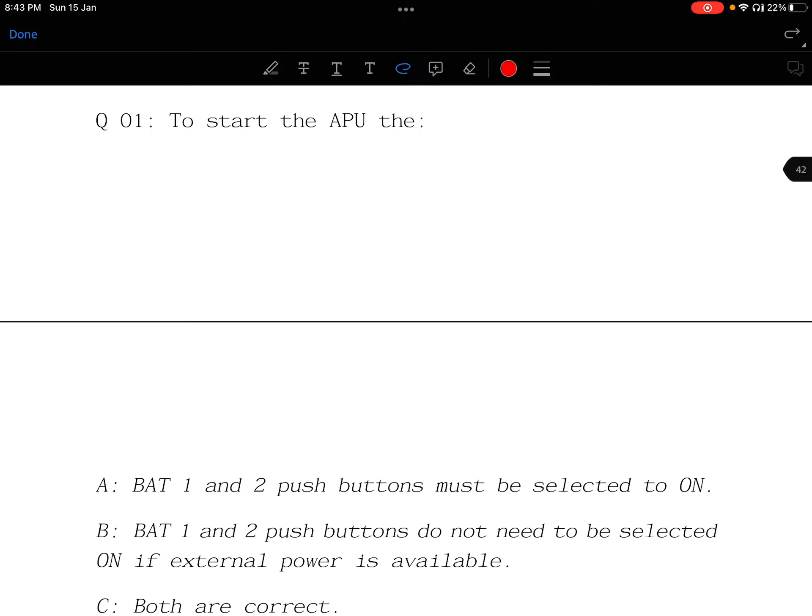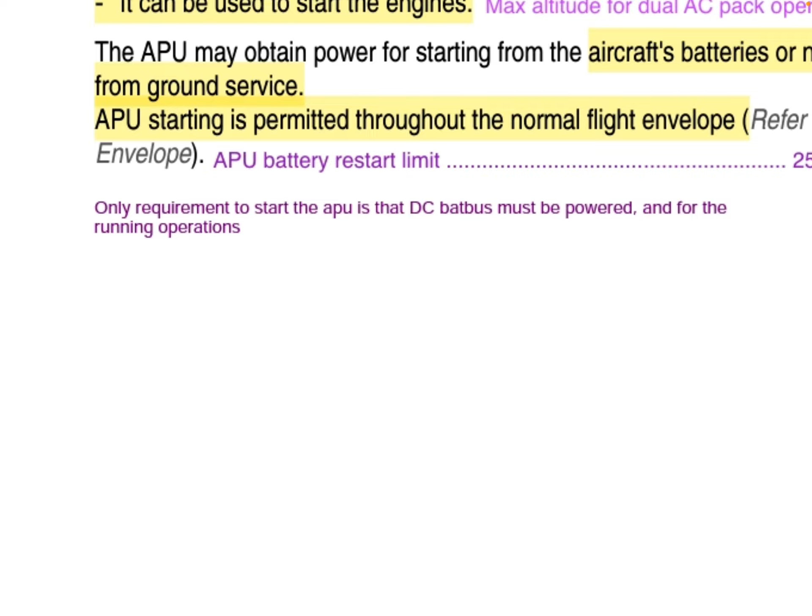So what do you think? I have told you, if you have gone through my video of APU from FCOM, that the BAT bus should be powered to run the APU. Let me show you. I told you that the only requirement to start the APU is that DC BAT bus must be powered, for the running operations, right?

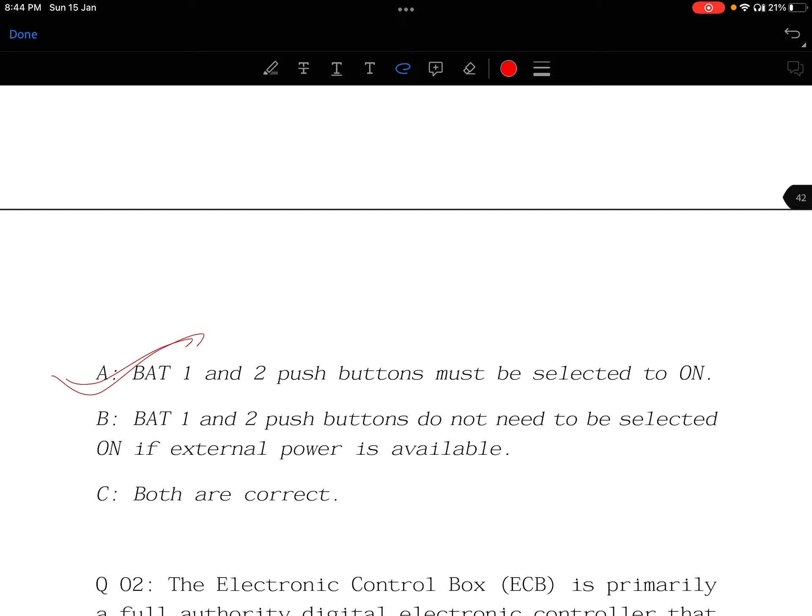So option Alpha is correct, right? Now we'll go to the second question.

The electronic control box, ECB, is primarily a full authority digital electronic controller that performs the APU system logic for all modes of APU operations, such as sequencing and monitoring of the start - correct. Speed and temperature monitoring - correct. Monitoring of bleed air and shutdown - correct. So all three options are correct, so all of the above.

ECB controls everything, right? When the APU master switch is released, a normal APU shutdown occurs - yes it occurs, but with a delay if the bleed air was in use. I have told you during FCOM discussion, if we are using APU bleed air, then it shuts down after a 60 to 120 second delay. It's known as the cool off period, right?

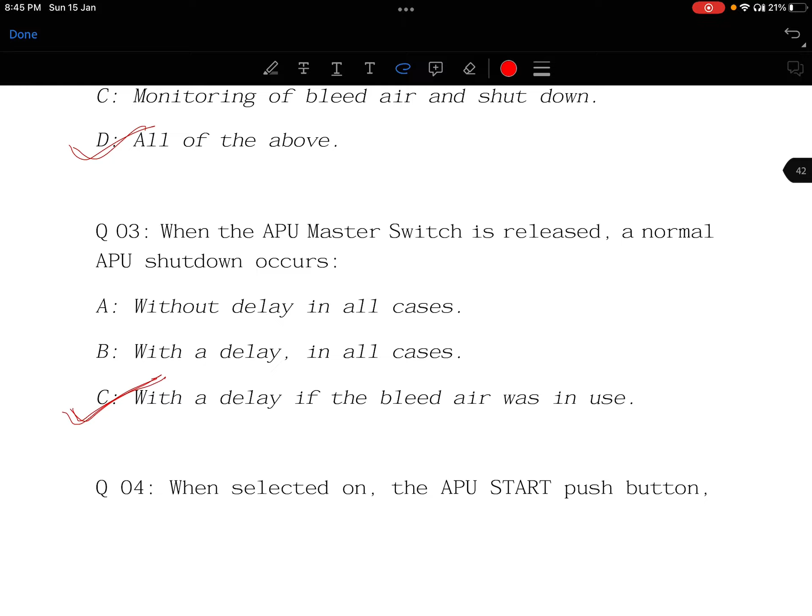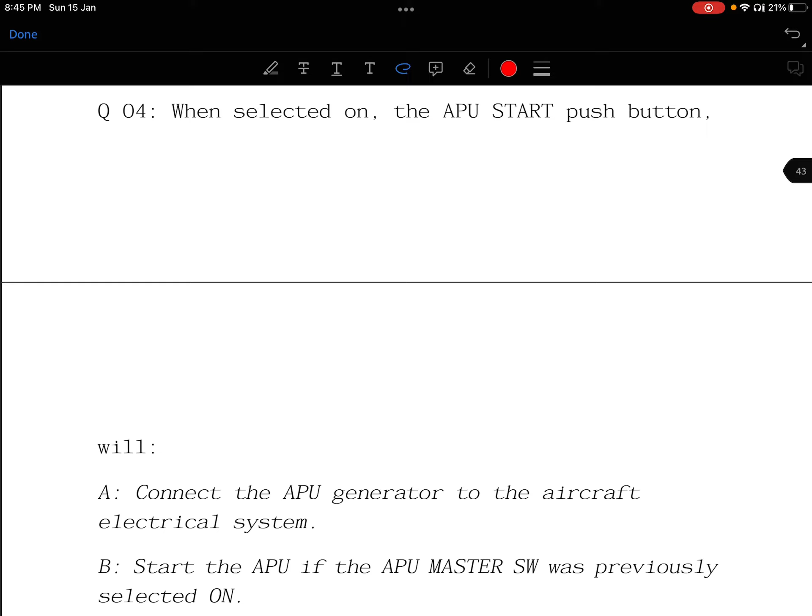When selected on, the APU start push button will connect the APU generator to the aircraft electrical system, and start the APU if master switch was previously selected on, right? This one seems right, Bravo. If you have selected APU master previously and then you select APU start push button, then APU starts.

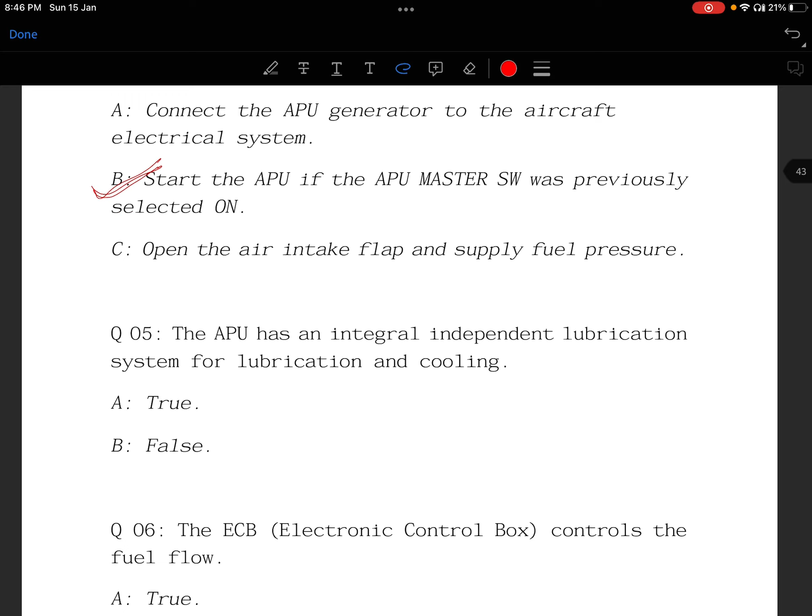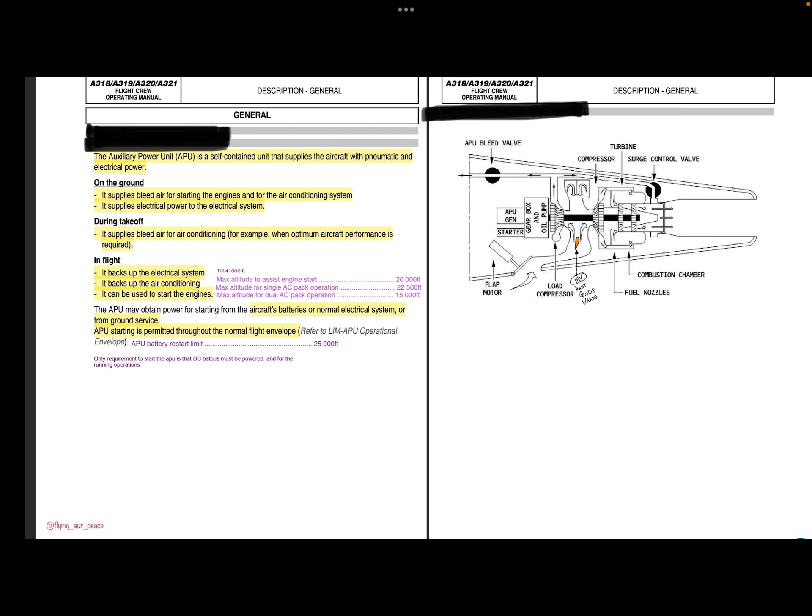Bravo. The APU has an integral independent lubrication system, correct? I can show you, this is in the notes, right? Where is it... here it is, oil system. APU has an integral independent lubrication system. You can check it from FCOM.

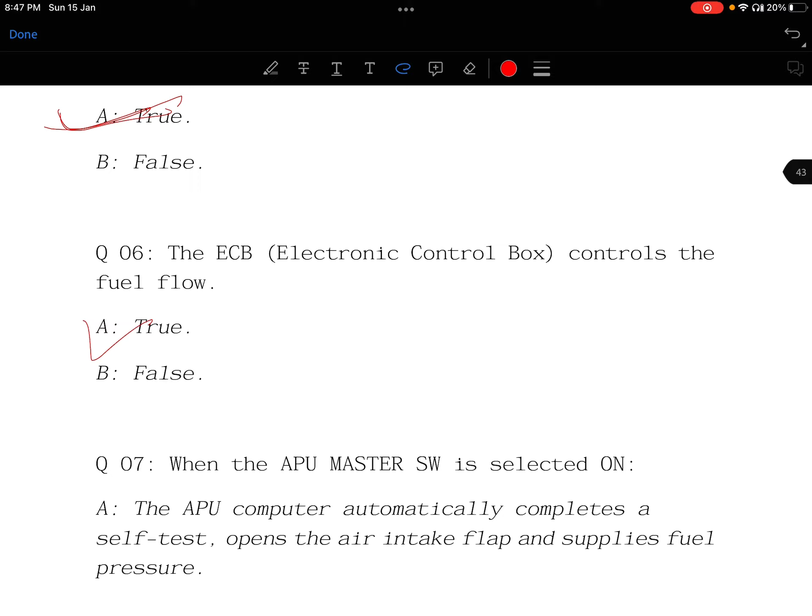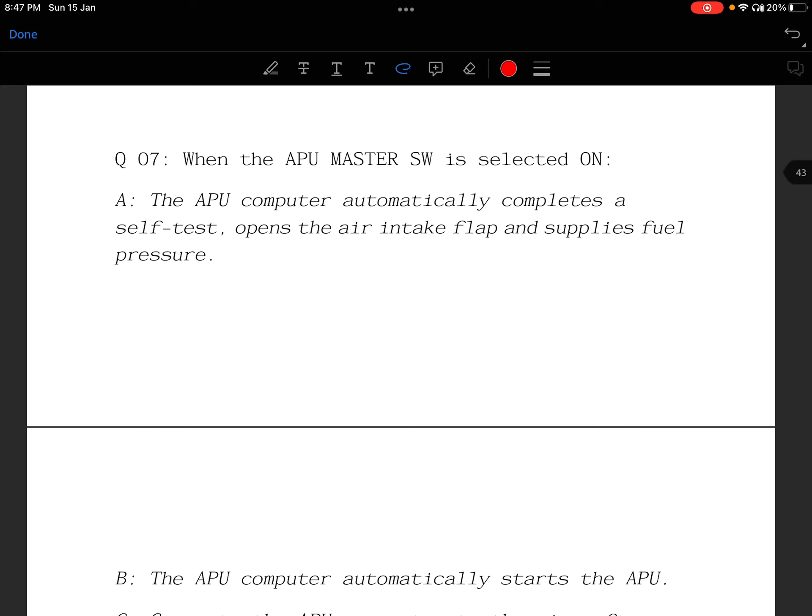The ECB controls the fuel flow - is it correct? Yes, ECB controls it. When the APU master switch is selected on, the APU computer automatically completes a self-test. Yes it does, opens the air intake flap and supplies fuel pressure, okay.

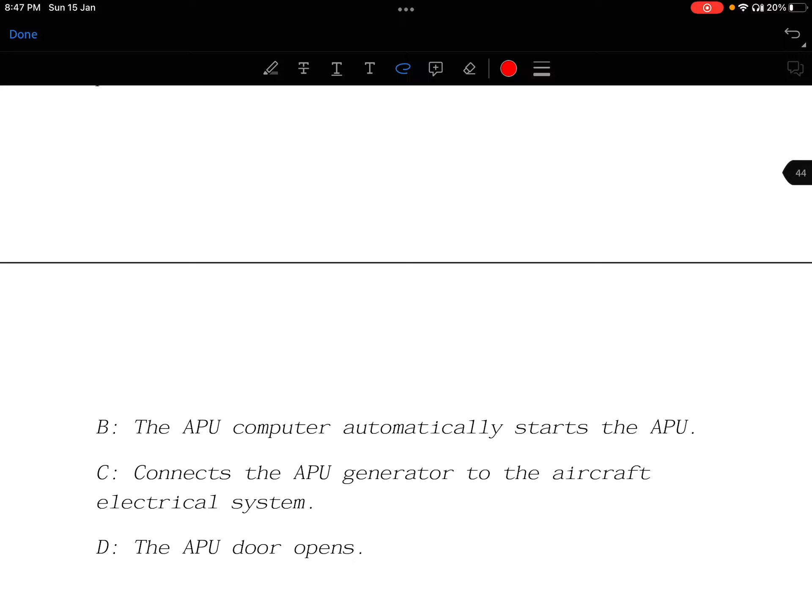Let's read the other options too. The APU computer automatically starts - no. Connects the APU generator to the aircraft electrical system - no. APU door opens - no. So option Alpha, yeah, correct.

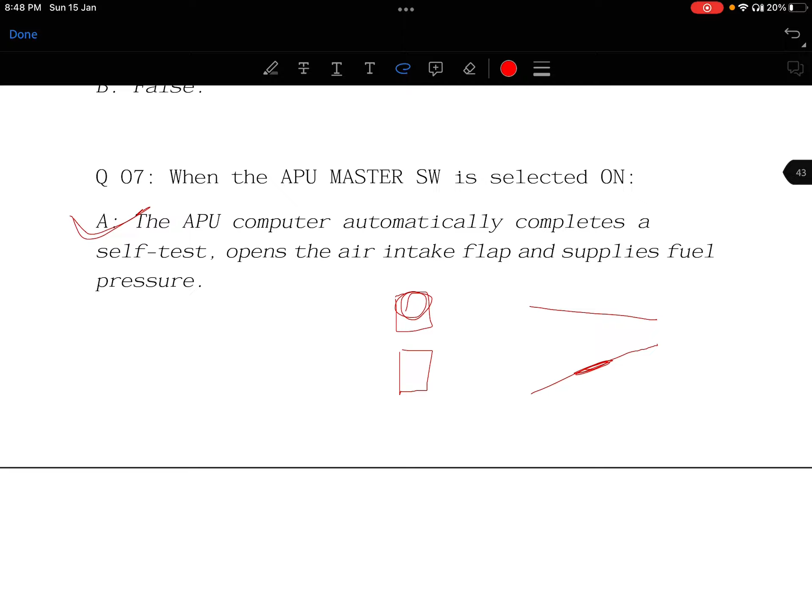So whenever you press the APU master push button, let's say, and this is the start push button - whenever you press master switch, the APU does a self-test for leaks and everything. Then it opens the air intake flap situated here, right, and supplies fuel pressure. Are you getting it? Right.

Now, eighth question. The APU master switch fault light will illuminate when APU low oil pressure is detected - seems right. When an automatic shutdown of APU occurs - right, correct. For an APU overheat or APU fire - okay.

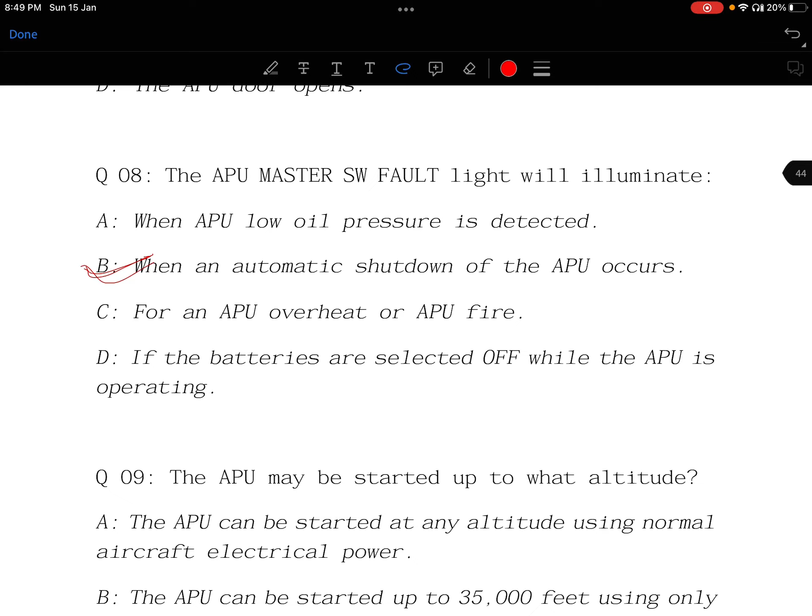If the batteries are selected off when the APU is operating - all Alpha, Bravo and even Charlie seem right, but I think Bravo is the more appropriate answer, everybody says. Let me show you from the FCOM.

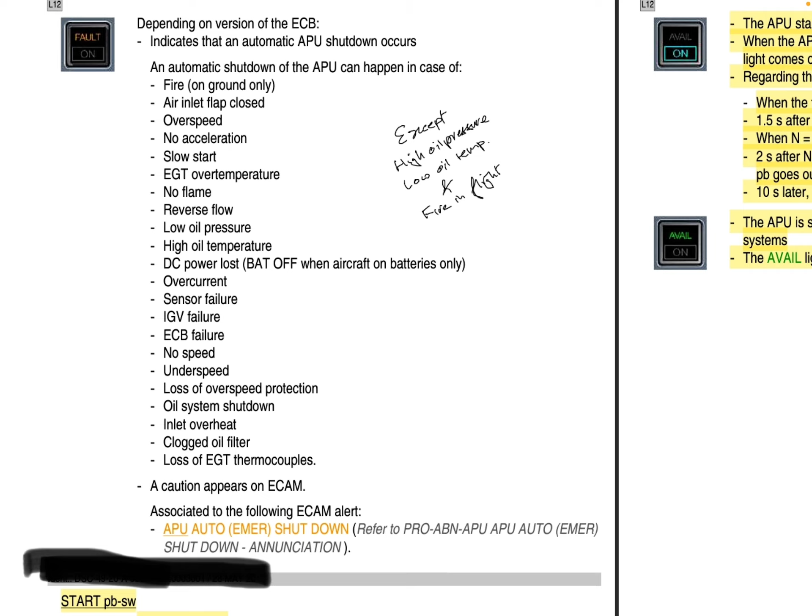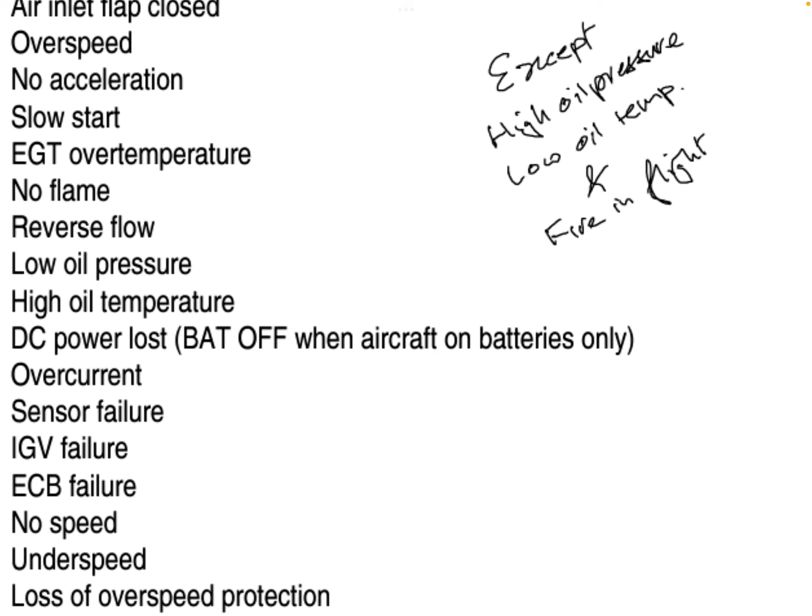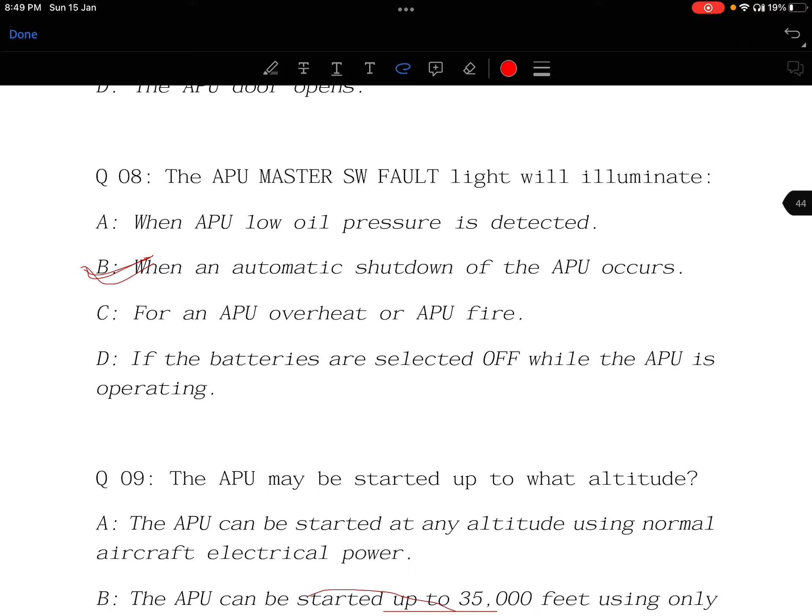Here are the reasons why the fault light illuminates on the master push button. So this was the option: APU auto shutdown. Other options were APU low oil pressure is detected, repeated a few times. These are right, but as no option says Alpha, Bravo, Charlie are correct, we are selecting option Bravo for this sake only.

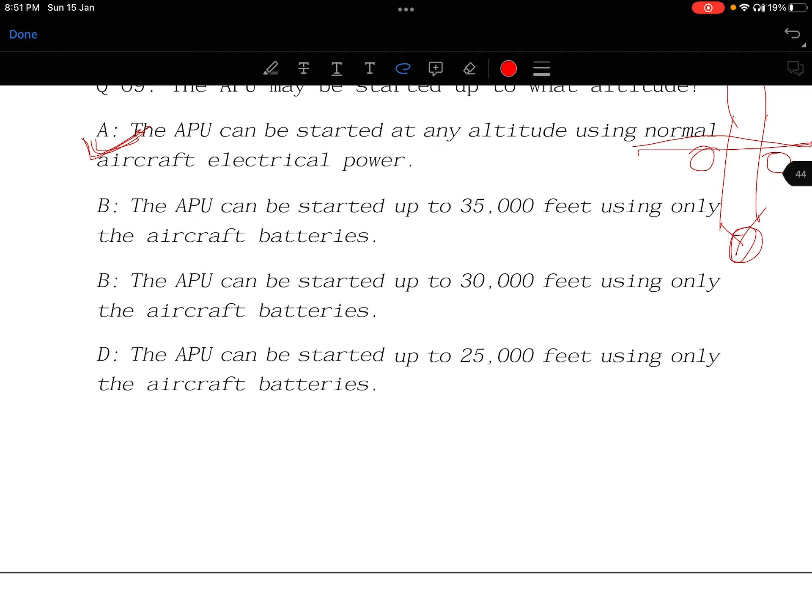Option Delta, you will figure out, also seems correct: the APU can be started up to 25,000 feet using only the aircraft batteries. Yes, it seems right, but the word 'only' is misplaced. If you figure out the meaning of this line, it's different - it's saying that only the APU can be started by using aircraft batteries only. No, it's not like that. But yes, if you are using aircraft batteries, then you can start it up to 25,000 feet only. Figure it out.

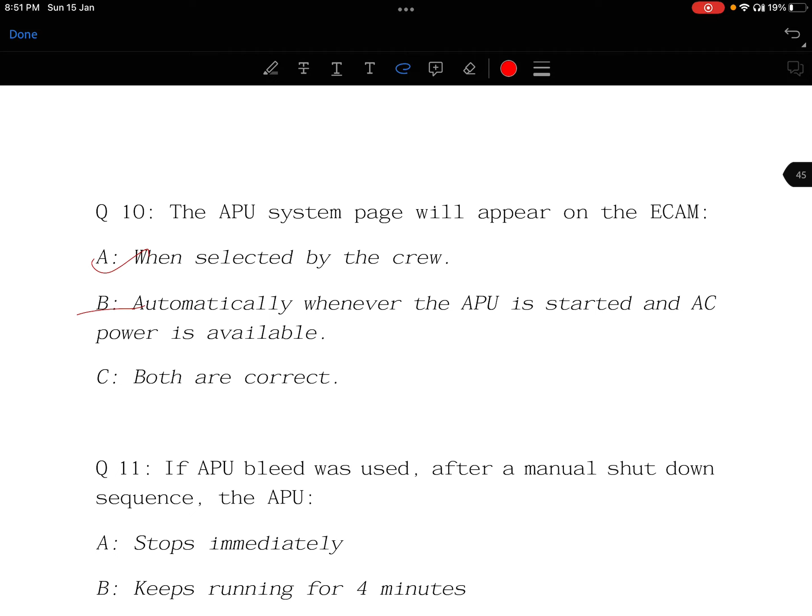The APU system page will appear on the ECAM when selected by the crew. Correct. It appears automatically whenever the APU is started and AC power is available. Correct, so option Charlie is right.

Question number 11. If APU bleed was used after a manual shutdown sequence, the APU keeps running for 60 to 120 seconds, right? So 60 to 120 seconds means 2 minutes, right? So both options seem correct.

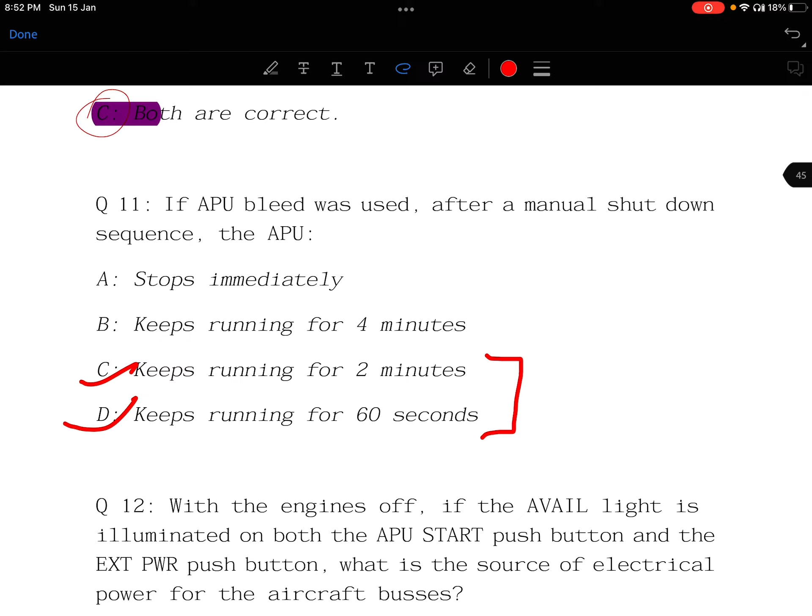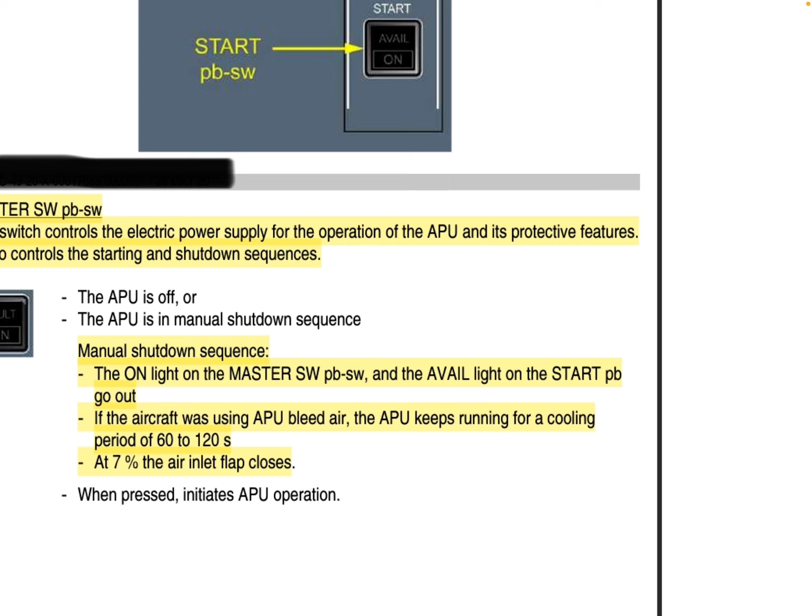I can show you if you want to. Here it is. I told you this is an important line, there are so many questions on it. If aircraft was using APU bleed air, the APU keeps running for a cooling period of 60 to 120 seconds. But if you go to the correct answer, then option delta is marked. But both options seem correct.

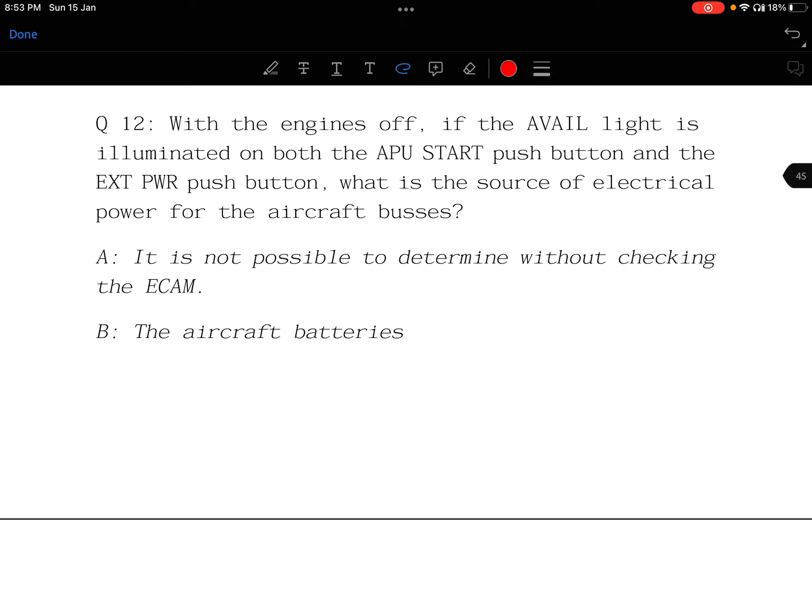With the engines off, if the avail light is illuminated on both the APU start push button and the external power push button, what is the source of electrical power for the aircraft buses? 12th question. Is it not possible to determine without checking? No, it is possible. Is it the aircraft batteries? No. External power, the APU, or external power?

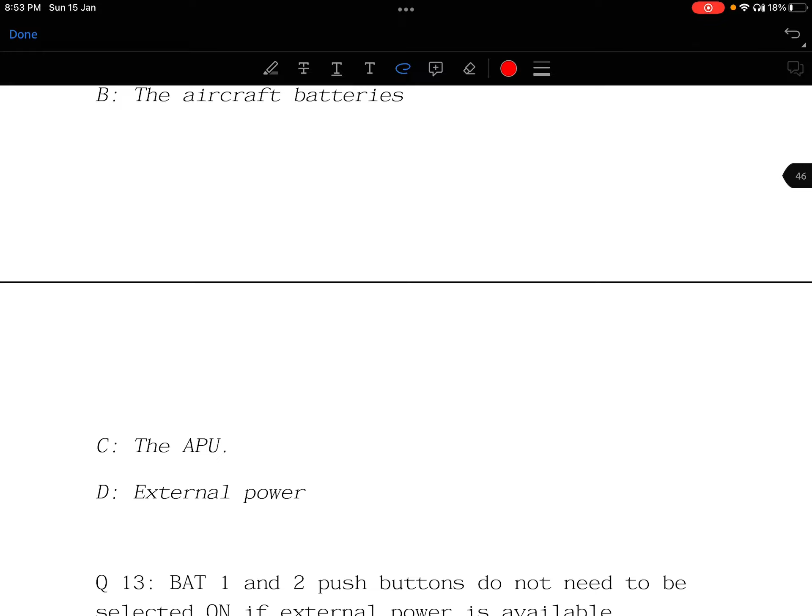As far as I know, here is the priority sequence. Number one, aircraft generators. Number two, external power. Number three, APU. And it's quite obvious looking at this priority, because the APU is a relatively very small generator, right? But the answer marked is Charlie, APU. I don't know why it is marked Charlie. According to me, it should be external power. If both are available, then the priority goes to external power.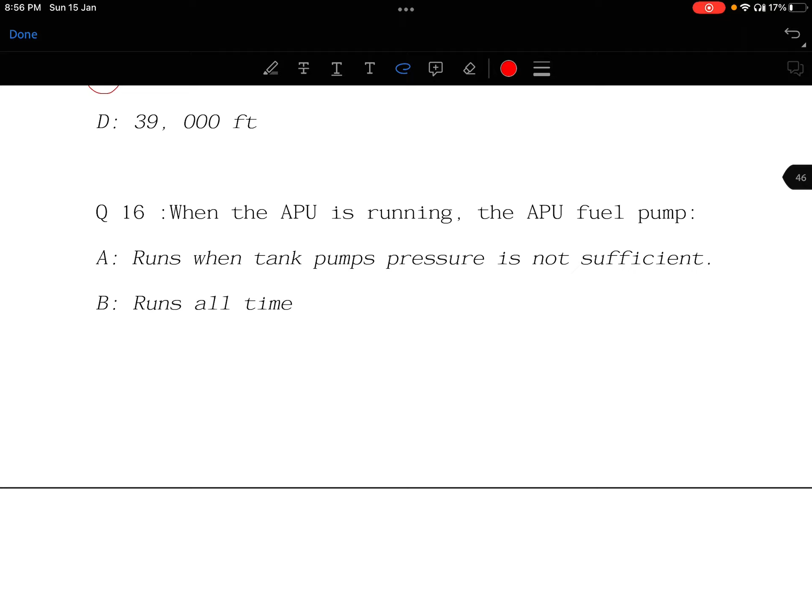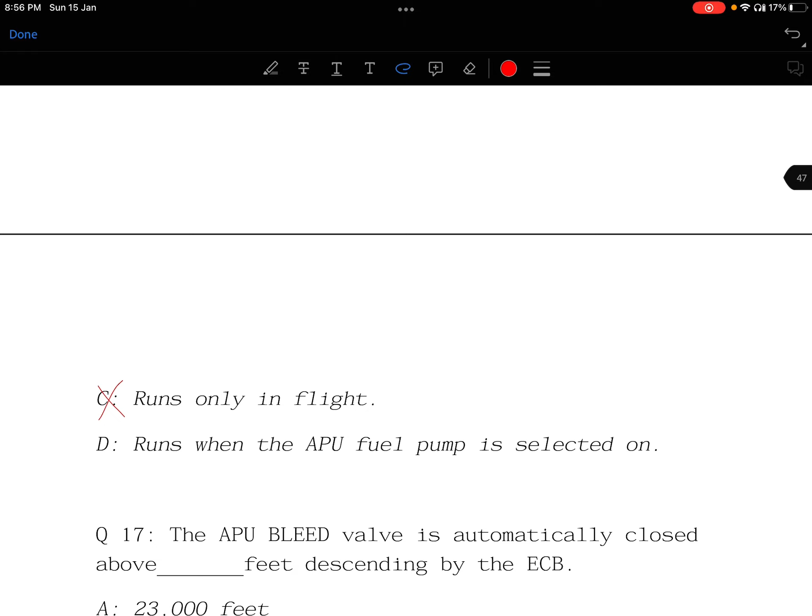When the APU is running, does an APU fuel pump run automatically when tank pump pressure is not sufficient? Yes, seems correct. Does it run all the time? No. Does it run only in flight? Wrong. Does it run when the APU fuel pump is selected? There is no such thing as an APU fuel pump, I have told you this during the FCOM explanation.

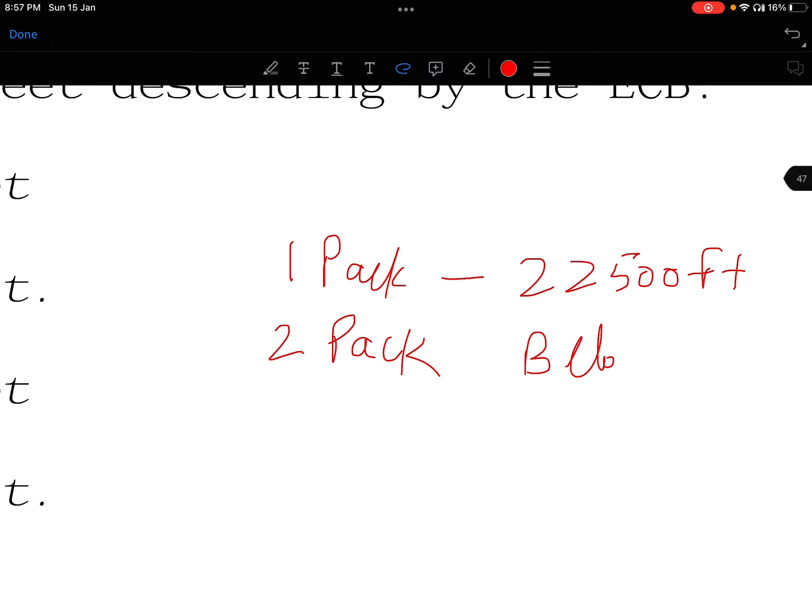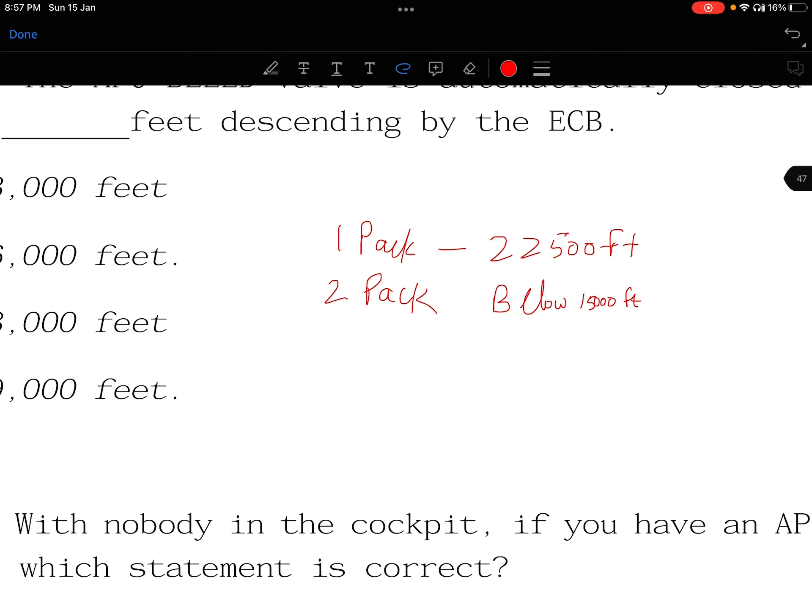17th, the APU bleed valve is automatically closed above. Nice, this is a good question. So we can use a single pack, one pack, till 22,500 feet, right? Two packs below 15,000 feet only. But if we are above 22,500 feet, then automatically the APU bleed valve closes. It's a safety feature, so we have given a margin of 500 feet. Airbus has given a margin of 500 feet, so option alpha seems right.

With nobody in the cockpit, if you have an APU fire, which statement is correct? So nobody in the cockpit if you are having an APU fire on ground, the APU emergency shutdown will occur, yes, and the APU fire bottle will be discharged automatically. Correct, seems correct. On ground, you have to perform ECAM actions.

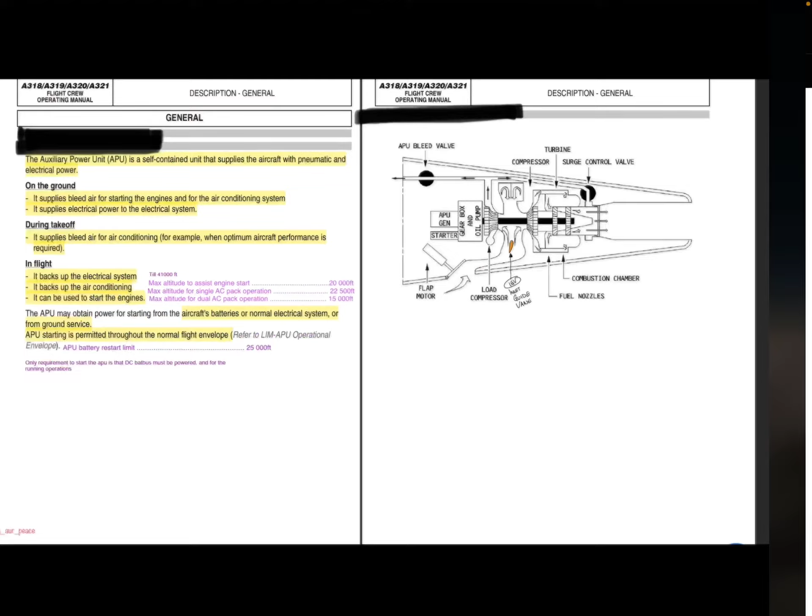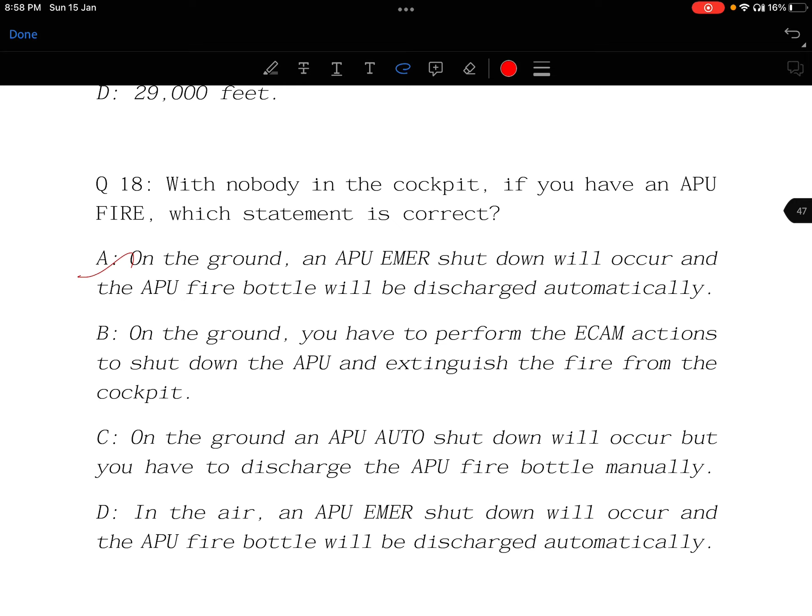How will you perform ECAM actions when nobody is in the cockpit? No. I have told you that the APU automatically shuts down if the aircraft is on ground, and the APU fire bottle discharges automatically, right? And we can shut it down from the 108 VU panel. I have told you where it is, it is situated near the nose here. We can press this APU fire push button, ground personnel can press it and shut it down, right? But we are talking about emergency shutdown. Option alpha.

19th question. The basic element of the APU is a single shaft gas turbine which delivers mechanical shaft power for driving the accessory gearbox. Yes, we have two-stage compressor, it is correct, but the mechanical shaft provides the power for driving the accessory gearbox, basically the generator.

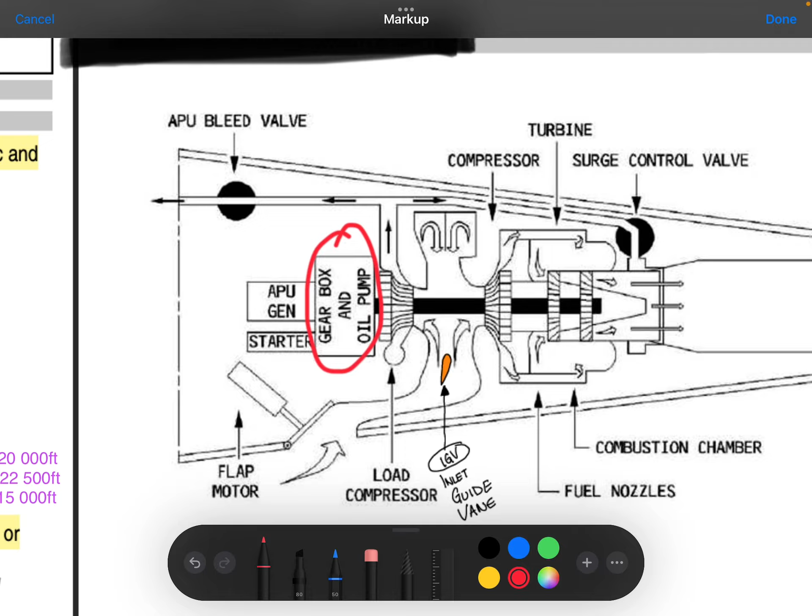Let me show you if you are finding difficulties to imagine. Here it is. So here is the accessory gearbox, and this is the mechanical shaft. It is connected. So option delta is correct. Mechanical shaft.

Yes, I agree, it's a compressor which is connected, but in the end, it is connected to the mechanical shaft.

Question 20th. We are reaching half of our questions. Fire on ground or fire in flight will cause the APU master push button fault light to come on. This is a very good question. So basically, if you are in flight and fire occurs, then it doesn't show fault light.

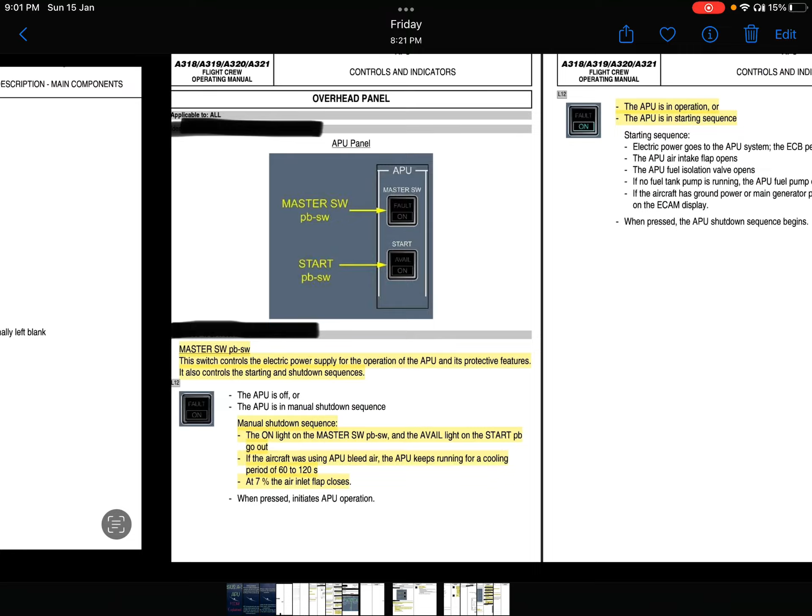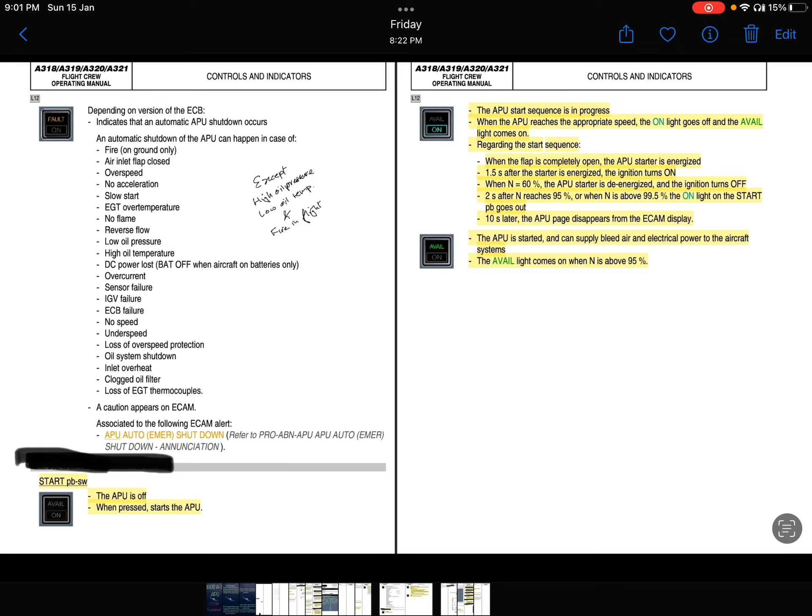So option Bravo is correct. If you are in flight, then this fault light doesn't come on. Where should I show you? Controls and indicators, obviously. APU fault light. Yes, here I have written it.

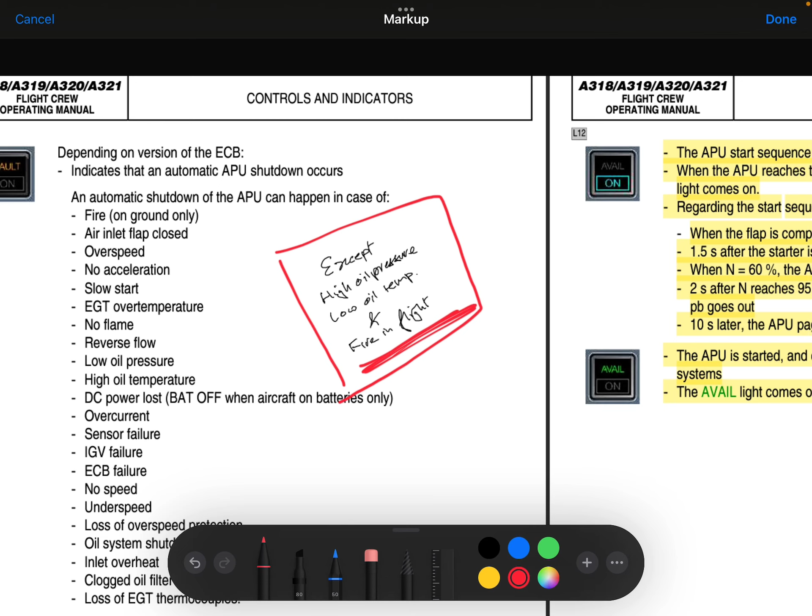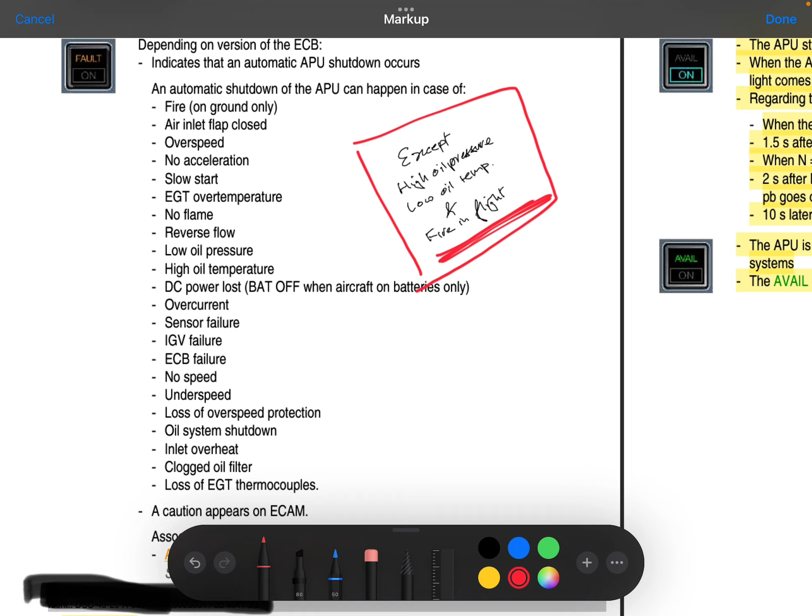If you are in flight, fire in flight is the exception. Let me clear this thing here only, right? So what are the cases when you want to see a fault light on this switch?

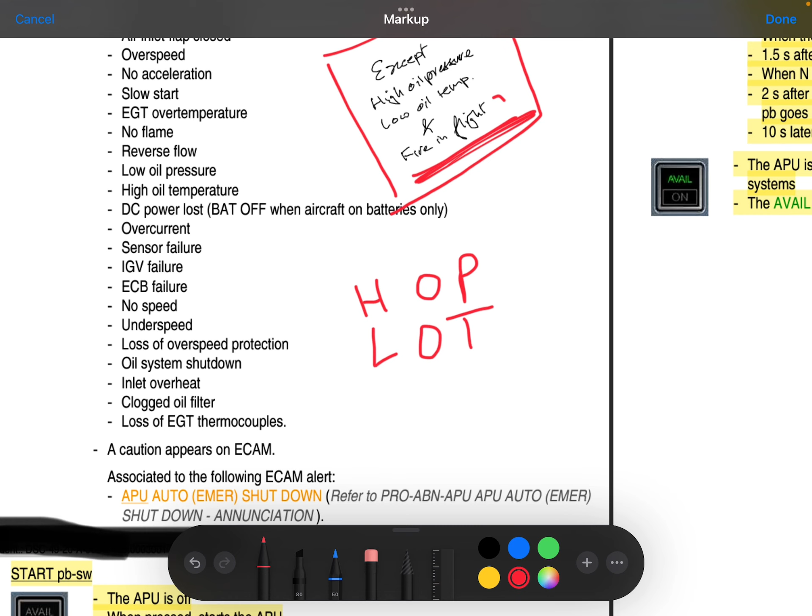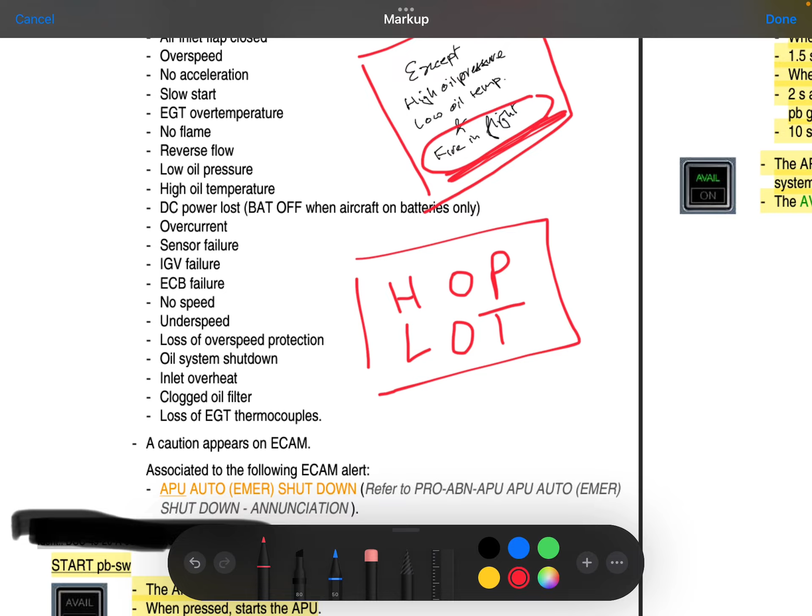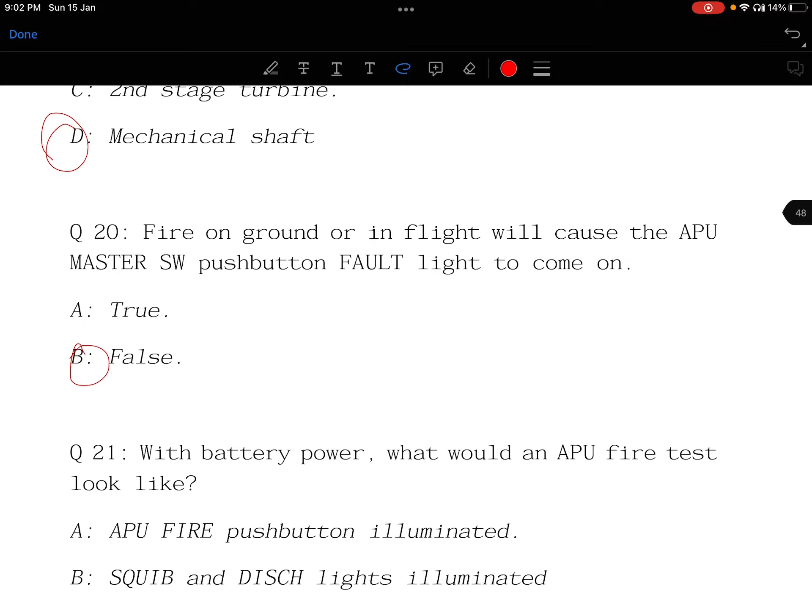With battery, so here option bravo is correct. With battery power only, what would the APU fire test look like? What happens when you test the APU? Press APU fire test.

Even if you are on batteries only, squib and discharge light illuminates, yes, and that fire push button - we have an APU fire push button, and this is for both engines 1 and 2, and this is for APU, right? So it will illuminate, correct. And there is a squib and discharge lights, those will also illuminate. So option Charlie.

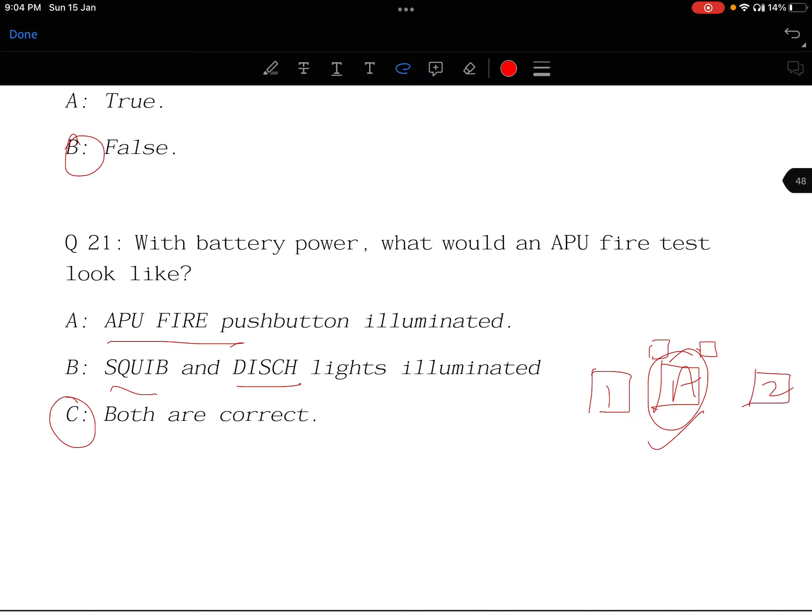22nd, the starter engages if the air intake is closed and the master switch and the start push buttons are on. No, wrong. Starter will not engage if the air intake is closed. Whenever this air intake is closed, then starter will not engage. This is the action of master switch.

It will do a self test. APU will do a self test, then will open air intake, and then starter engages thereafter. So bravo, right? A flap open indication is displayed in amber when the APU air inlet flap is fully open. It seems very right, correct.

But here the catch is, it is displayed in green color, not amber color. Flap open indication is displayed in green color when the APU air inlet flap is fully open. So bravo. Where should I show you? 23rd. Flap open, it is 7th. Flap open displayed in green when APU air intake flap is fully open, right?

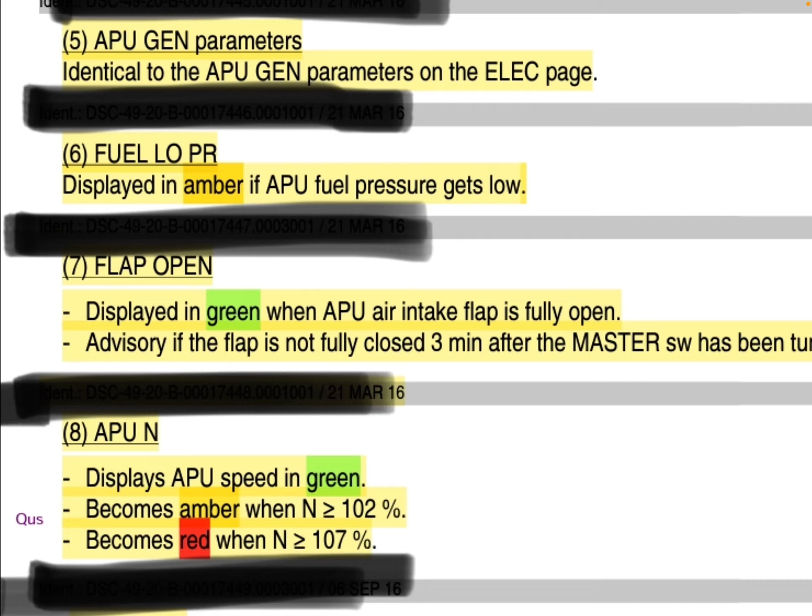So this is a little confusing. During my attempt I did it wrong. Even I did it wrong, so no worries, it's a very small thing.

24th, the APU may obtain power for starting from ground services, right? Normal electrical supply, correct. The aircraft battery is on the combination of, correct, so delta is correct.

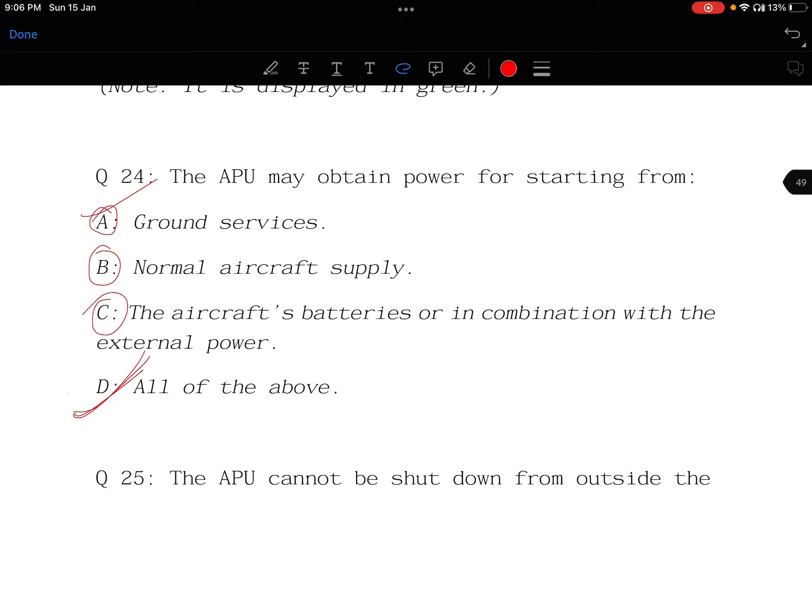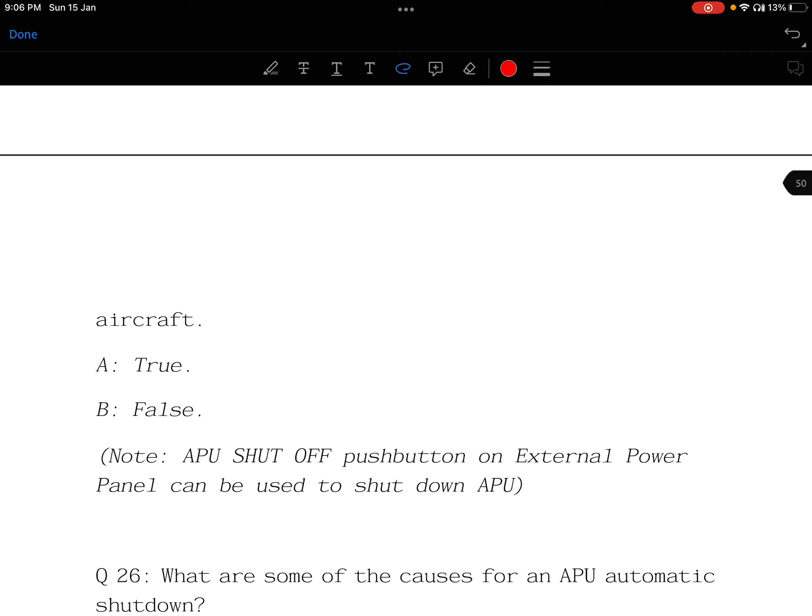The APU cannot be shut down from outside - wrong. APU can be shut down from outside also. I have shown you that panel near the nose wheel, right? We can shut it down from there also.

What are some of the causes for APU automatic shutdown? Remember that, do you remember this? What are the causes of automatic shutdown? So if there is fire on ground, correct, on ground only. EGT over temperature, right. No acceleration, correct. Low oil pressure.

Try to figure it out by the trick I told you - Hop lot. Automatic shutdown will not occur with high oil pressure, not low oil pressure. So figure it out, read them, and then you will find option delta is correct. Fire on ground only, underspeed, overspeed, EGT over temperature, reverse flow, low oil pressure - it will shut down.

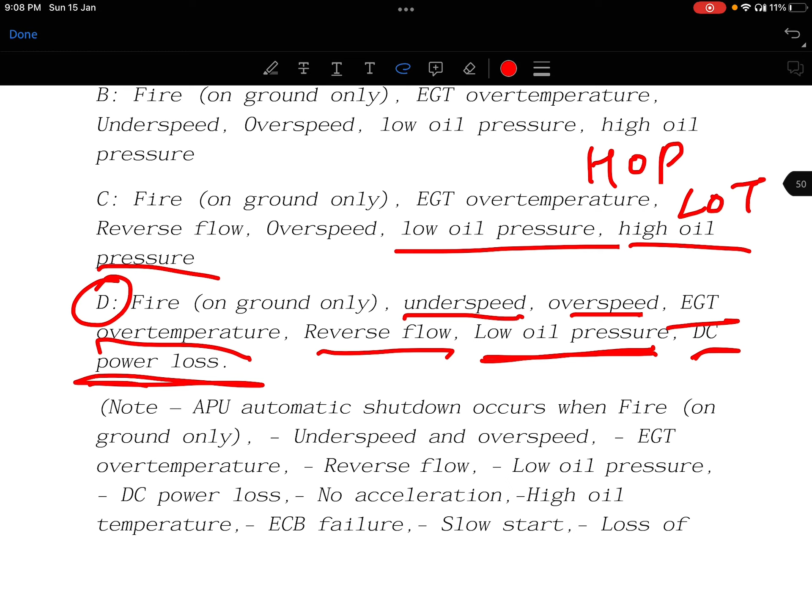Maximum altitude for APU bleed operation is - 15,000 feet, 18,000 feet, 20,000 feet, or 22,000 feet. So we can use a single pack till 22,500. So this is the nearest option we have, 22,000 feet, right?

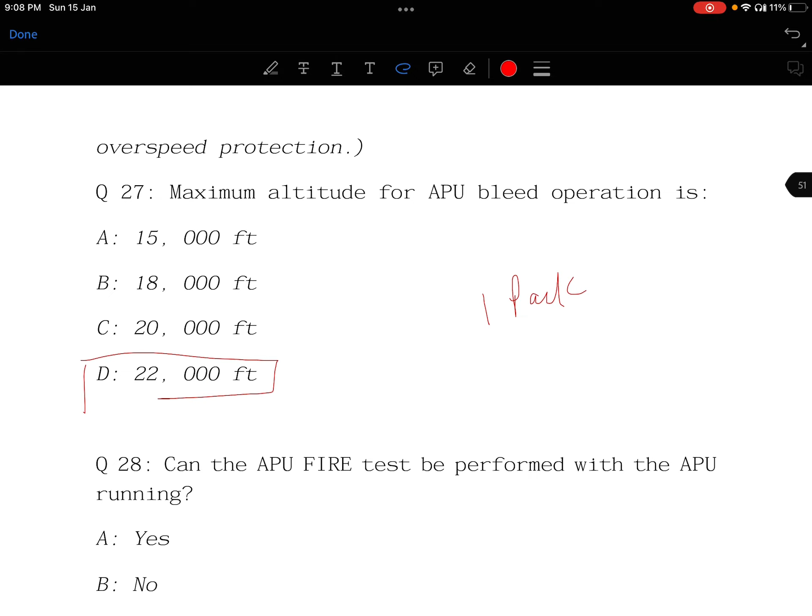Can the APU fire test be performed with the APU running? Yes, you can perform an APU fire test, but if you press that fire push button for more than 3 seconds, then there are chances that APU may shut down, right? So yes, you can.

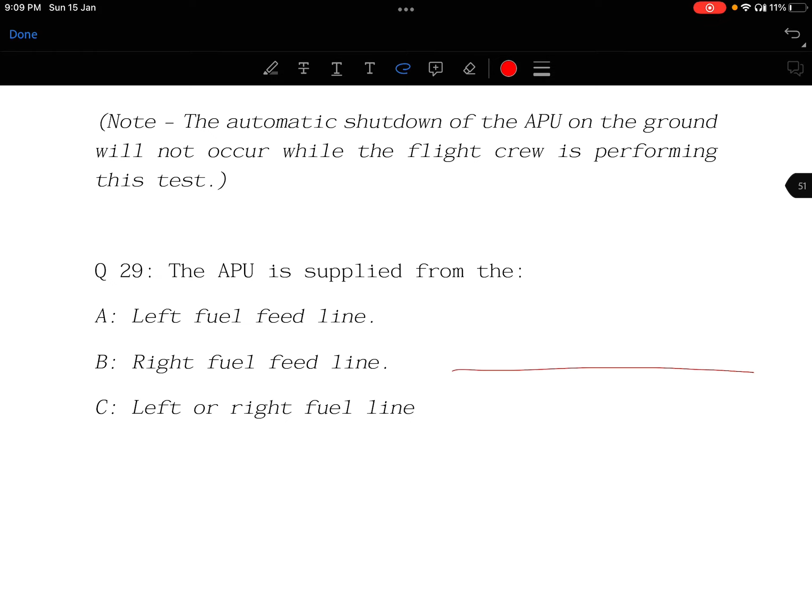APU is supplied - I have told you, let's say this is the aircraft, then APU is supplied from the left hand tank, right? From this left hand tank, left hand fuel line.

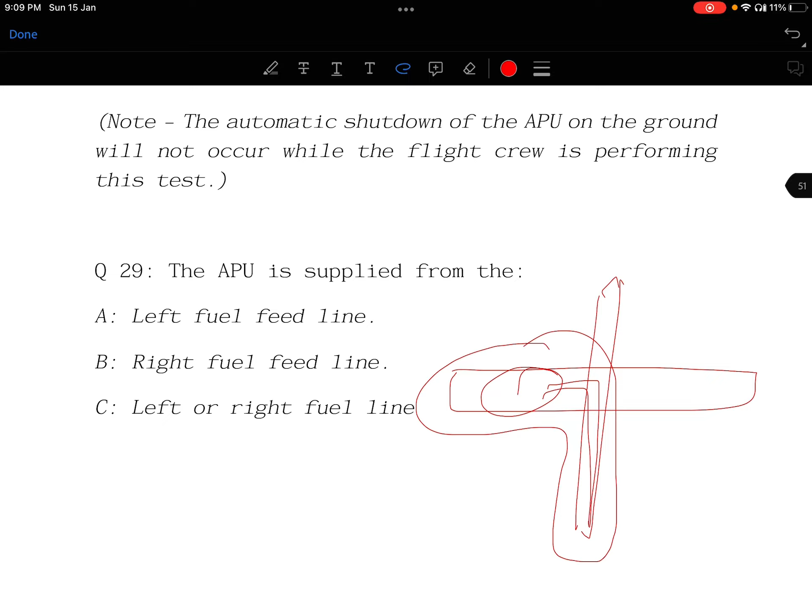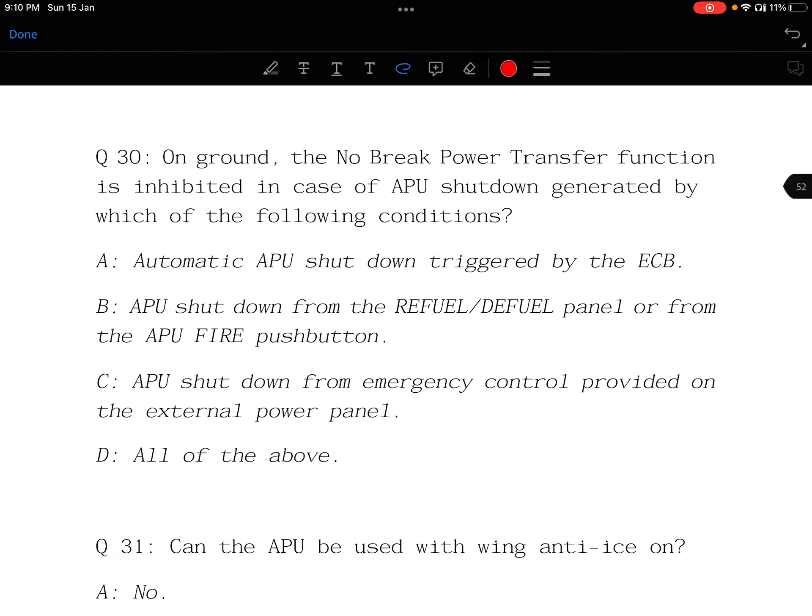On ground, the no break power transfer function is inhibited in case of APU shutdown generated by which of the following condition? Automatic APU shutdown triggered by ECB, APU shutdown from refuel panel or from the APU fire push button, or APU shutdown from emergency control provided on the external power panel. Option delta seems correct: all of the above.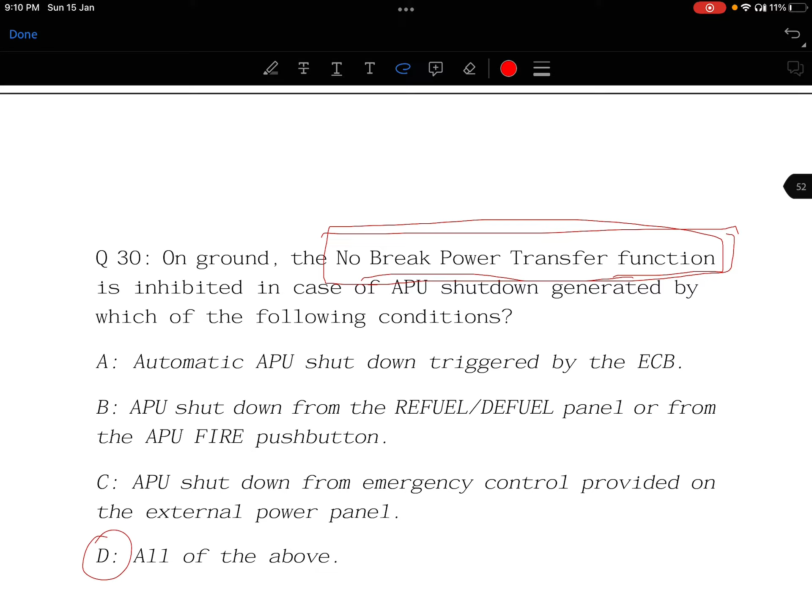Can the APU be used with... I have no idea about this no break power transfer function. If somebody can explain this thing in detail, please do it in the comments. Even if you can just explain what this function does.

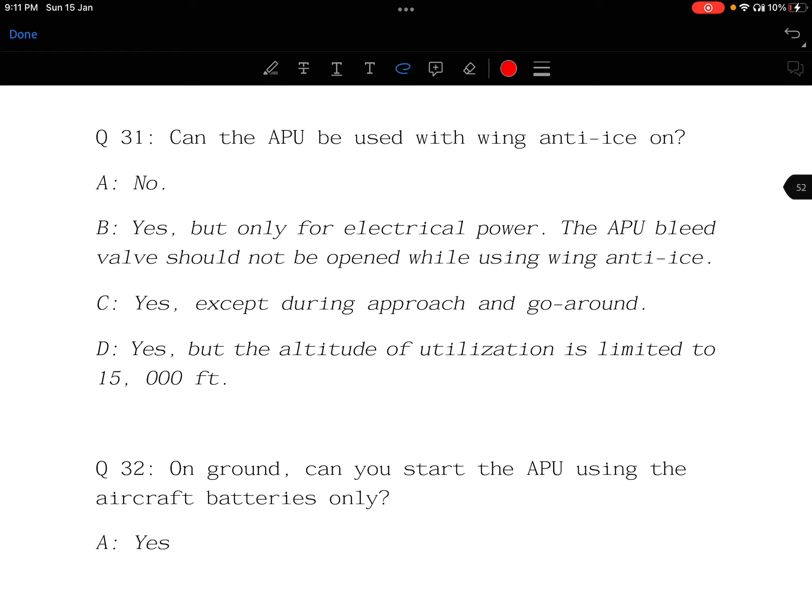Can the APU be used with anti-ice on? Yes, you can use APU with anti-ice on, but only for electrical power, not for bleed. Are you getting this? They are asking, can you use APU on ground? Yes, you can, but for electrical power only, because APU can't provide bleed air for the cabin and even for anti-ice. It's a very small unit, right?

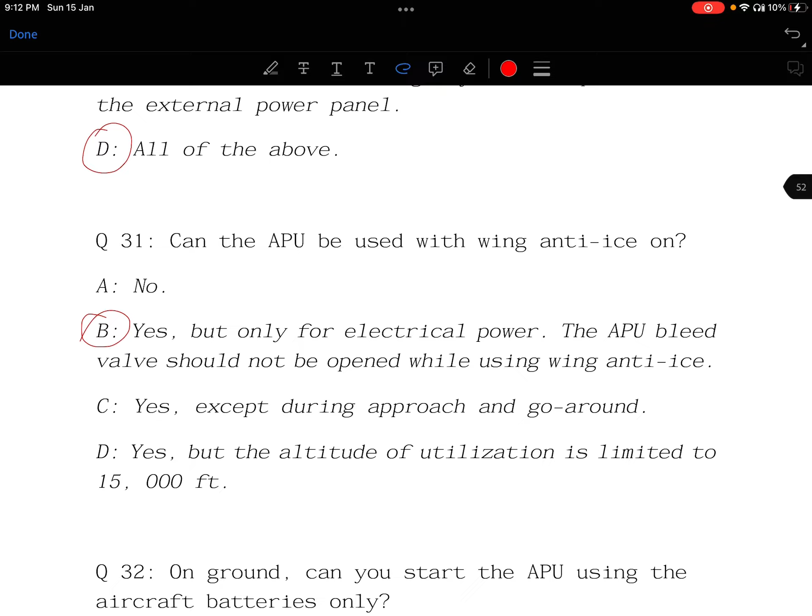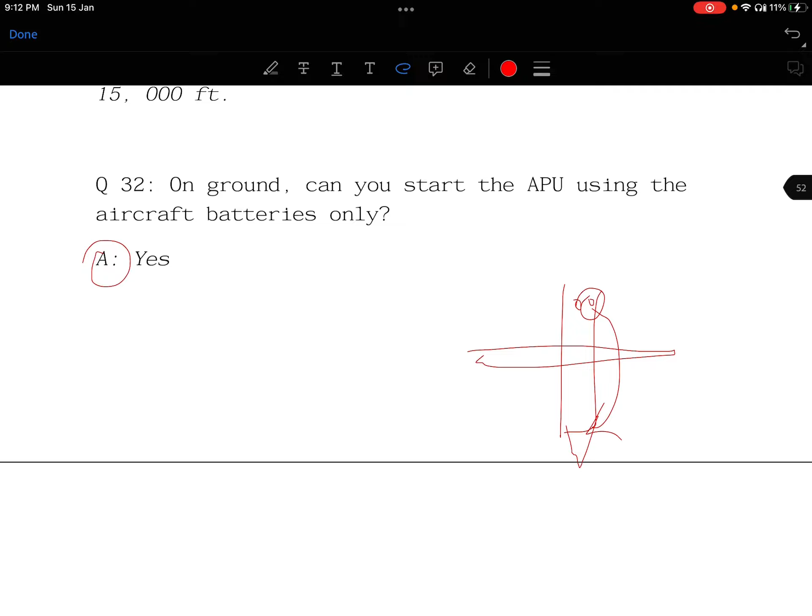On ground, can you start the APU using the aircraft batteries only? Yes, you can start APU with batteries only. This is how we do it. If we do not have external power, we start APU by these batteries, then we take bleed for the engines, then we start the engines, right? This is how it works.

When starting the APU, the low pressure indication appears amber when an APU fuel low pressure is detected, is it correct? You remember? But this is not the case, do not get confused. They are talking about fuel low pressure indication on the ECAM page. Are you getting it? Fuel low pressure indication, yes, this is correct.

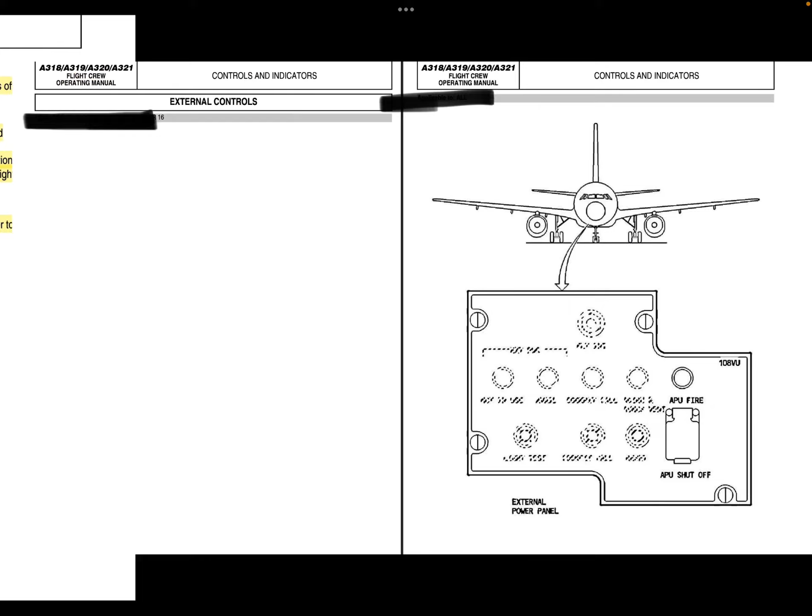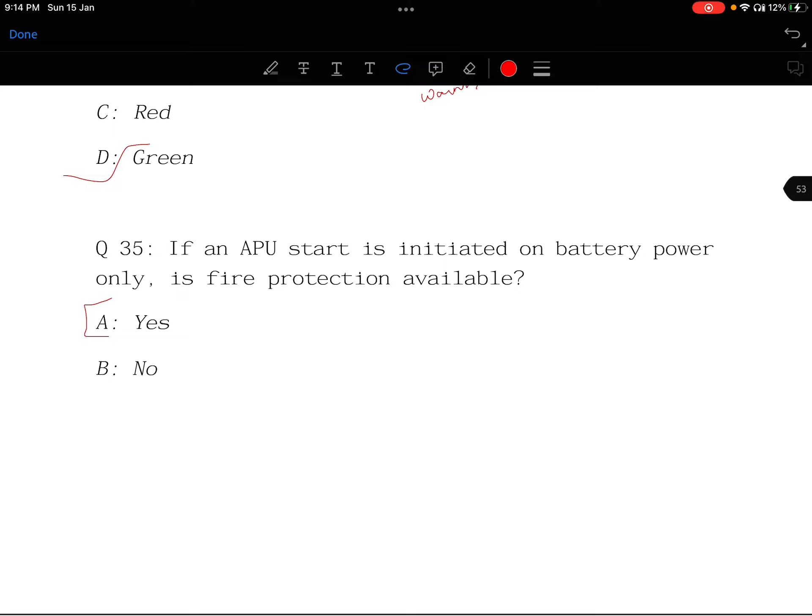If an APU start is initiated on battery power only, is fire protection available? Yes, no doubt fire protection is available.

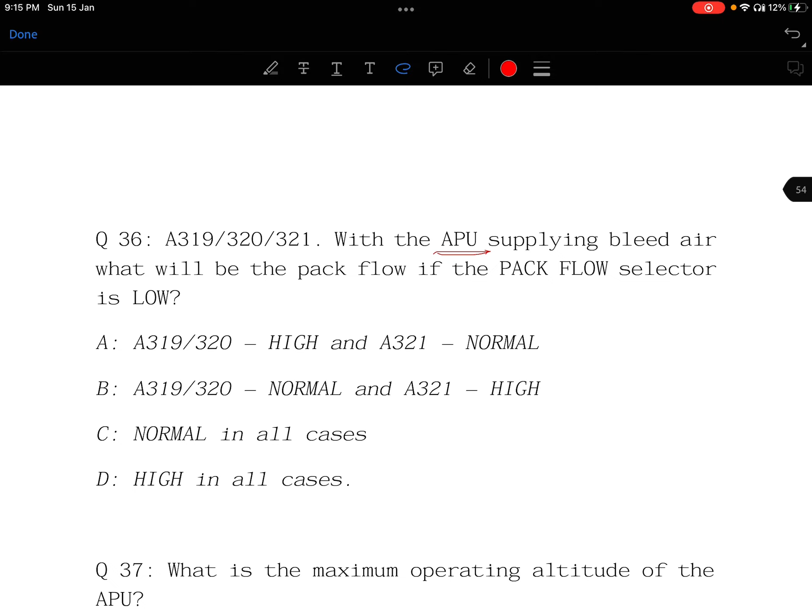319, 320, 321 with the APU supplying bleed air, what will be the pack flow if the pack flow selector is low? You remember in air conditioning and pressurization chapter, I have told you that whenever APU is supplying bleed air, no matter the position of the selector, low, normal or high, the flow will be high, right? But this is for 319 and 320 only. In case of 321, it will be from low to normal.

Are you getting it? I haven't studied about Airbus A321's air conditioning and pressurization system in detail, but I am aware of A319 and 320, so they go high. The answer should be high in all cases, but from what I have studied, I gathered this information that it goes from low to normal in A321s. If you know it better, please let me know in the comments.

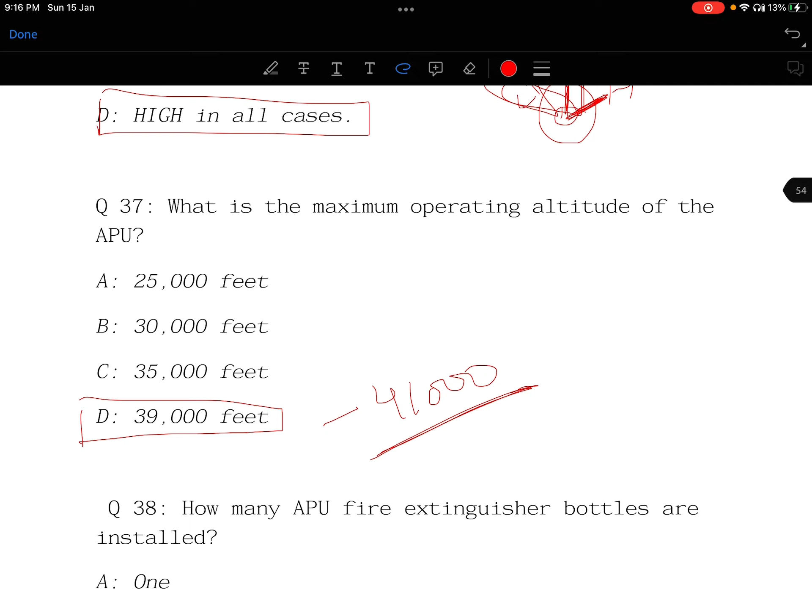What is the maximum operating altitude for the APU? It is 41,000 feet for APU to be operated. 39,000 feet is the highest option given, that's why I would choose option delta, though the actual limitation of the APU is 41,000 feet.

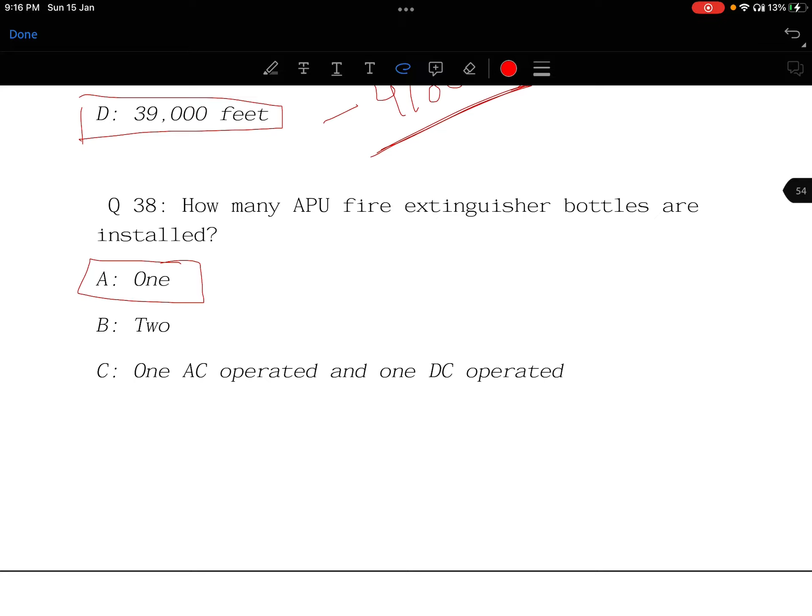How many APU fire extinguisher bottles are installed? There is one APU fire extinguisher bottle in APU with two nozzles, right? We have discussed it in the fire protection chapter.

Question 39: will the APU bleed valve close automatically during climb? Will it reopen during descent? I don't think so. No.

With battery power only, what would the APU fire test look like? Fire push button illuminates and squib and discharge lights illuminate, right? I have told you in the previous question also, with battery power only, APU test goes normal. So APU fire push button will illuminate and squib discharge light will illuminate. Option alpha.

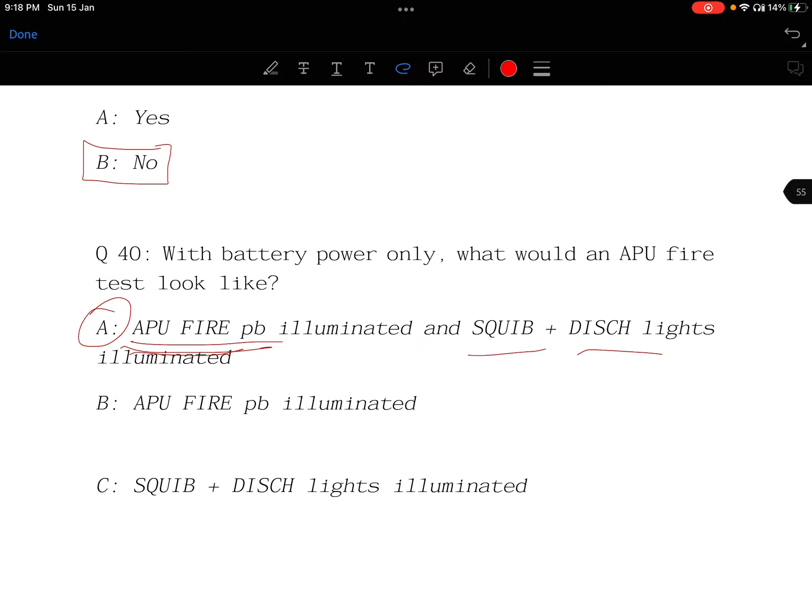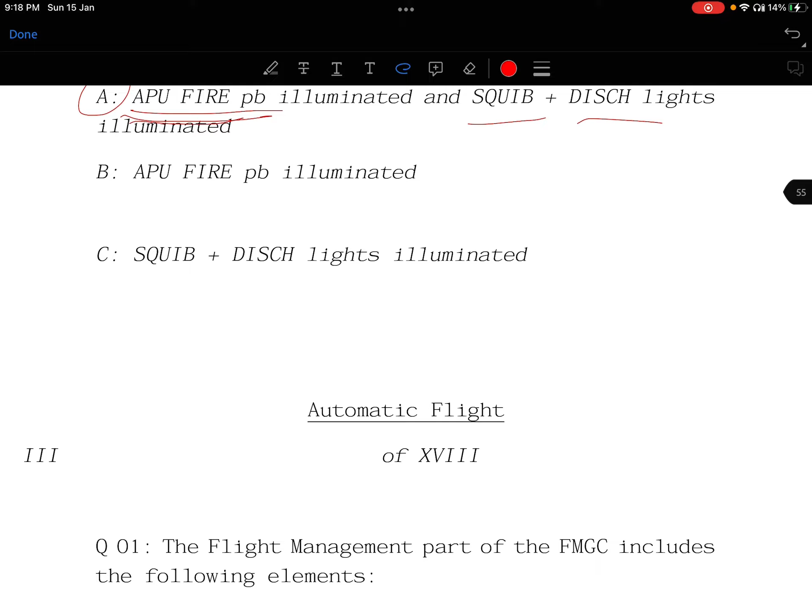Auto flight, this is another chapter, auto flight. We will discuss it some other day, or if you want, you can watch the video I have made on auto flight questions from smart cockpit. So here the chapter ends from smart cockpit.

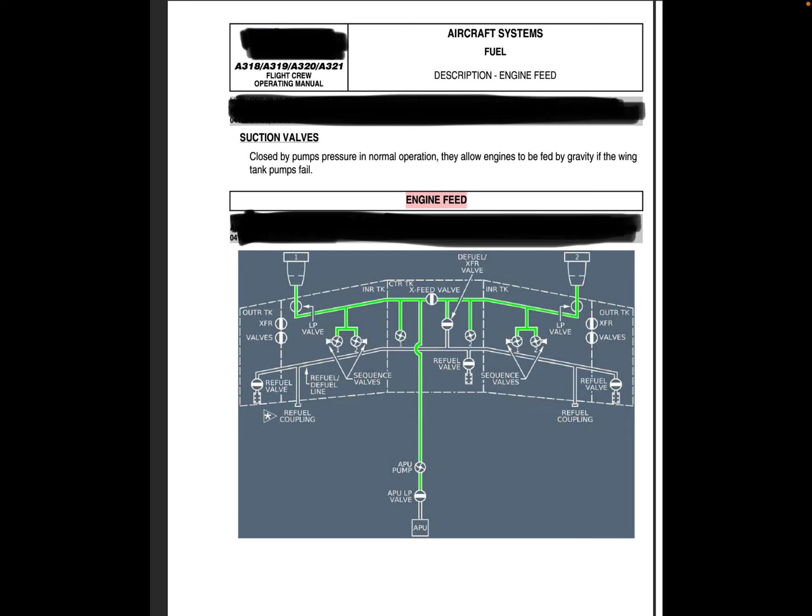If you were facing difficulties during these questions, please go through my FCOM explanation video I have uploaded. You will get it better, and you will not be facing any difficulties during these questions.